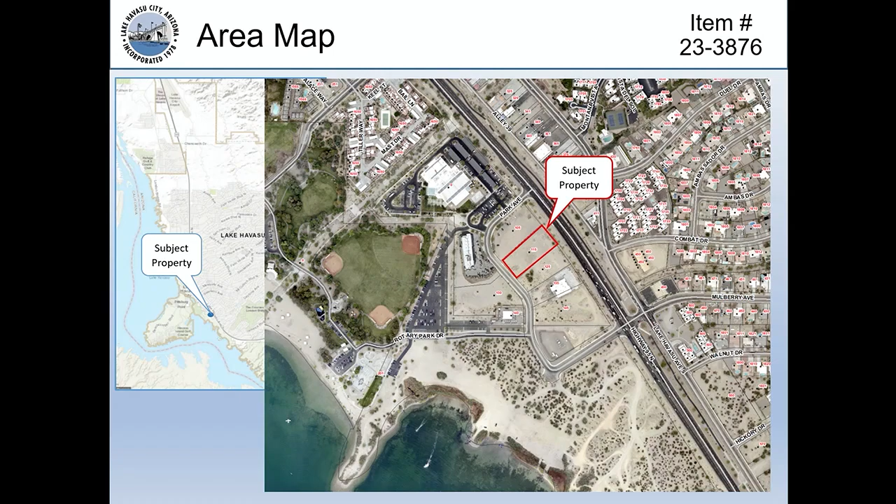Mr. Chairman, Commissioners, thank you very much. The subject property is located on the east side of Park Avenue, north of Mulberry Avenue, near the Aquatic Center. It's currently vacant and undeveloped. It measures about 1.25 acres, and there's a 50-foot utility easement at the rear.

The property and the properties to the east across the highway, and to the north and south, are zoned C1 limited commercial and are a mix of vacant land and developed commercial uses. The properties to the west across Park Avenue are zoned Island Body Beach, with a condominium and apartment complex in the permitting process and a hotel that's been constructed.

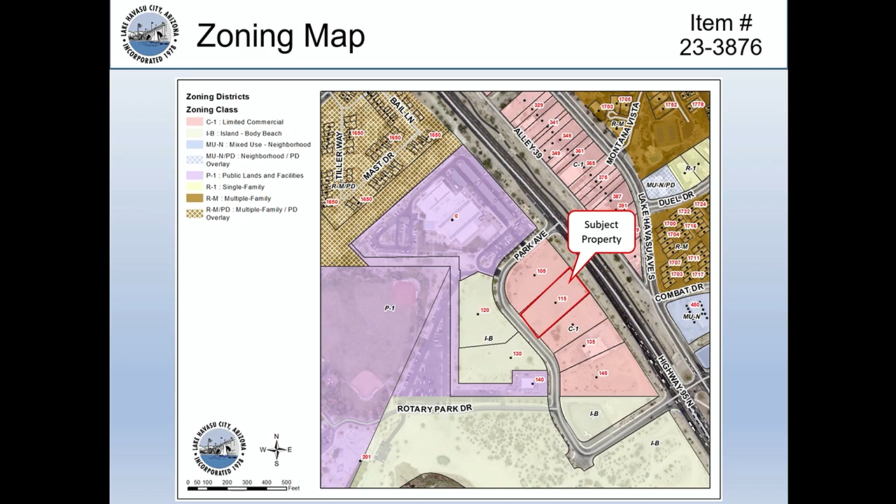The applicant's letter of intent and general development plan again show the two buildings as before. One is a 2,600 square foot restaurant drive-through. The other building is a mixed-use building with about 6,300 square feet of commercial uses on the ground floor, and the upper two stories are 24 apartment units, with 12 apartments on each of the second and third floors.

There will be reserved parking for the apartments, with the remaining lot used for the commercial and drive-through uses. The lot will be landscaped and designed to meet all the city standards.

The building elevations are shown here. The C1 zoning district allows building height up to 25 feet. The drive-through building will be well under that limit. However, the mixed-use building is proposed at 30 feet in height when measured from the zero point of the lot, which is 5 feet higher than the 25 feet allowed in the C1 district. Therefore, the applicant is asking for an exception to allow a 30-foot building height.

The mixed-use building will also include 24 multiple-family two-bedroom apartments, 12 units on each of the second and third stories. Multiple-family residential is not allowed in the C1 zoning district, so the applicant is asking for an exception to allow the use through this PD planned development process.

The building elevations indicate a 3-story building with varied parapet roof heights. Multiple commercial uses and covered parking are on the ground floor, with residential units on the second and third floors. Some residential units have balconies, and the building exterior is a mix of white, gray, and tan, with a number of alcoves and recesses to break up any long expanses.

The multiple-family use will be similar in appearance to a hotel, which is allowed in the C1 zoning district. Staff does not anticipate the multiple-family use having any major impacts on the neighborhood.

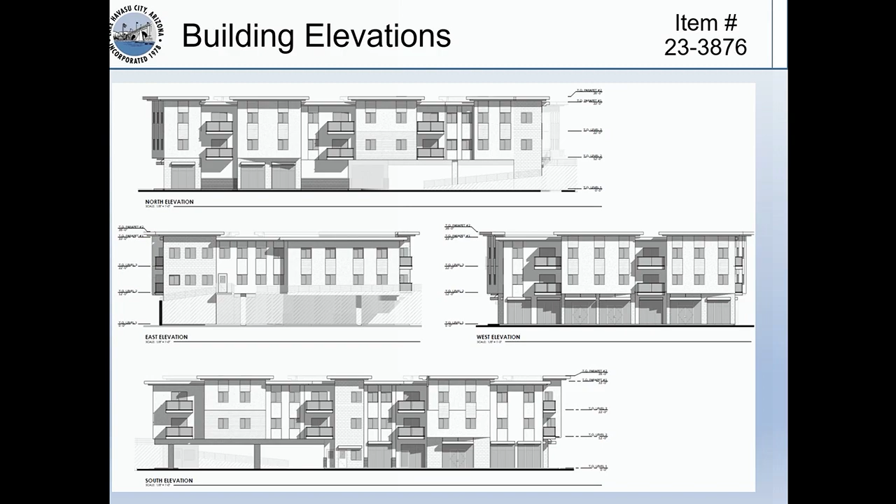The bicycle facility reduction allows 12 bicycle spaces in lieu of 12 vehicle parking spaces, resulting in a reduction of 12 parking spaces. So a total of 18 spaces are removed through the parking allowances, resulting in 70 spaces required. The plan shows 71 spaces, so the proposed number and type of parking spaces does meet the development standards, and no parking exceptions are requested as part of this request.

Unisource is asking that this portion of the easement be left completely open, allowing only landscaping or gravel at most. However, per our development code, vehicle travel aisles are to be improved with asphalt or concrete surfaces, or an alternative paving material as approved by the zoning administrator. The developer is proposing compacted decomposed granite as a paving material, which is not among the options approvable by the planning division manager. Therefore, a condition to allow compacted decomposed granite paving in this area is included for consideration.

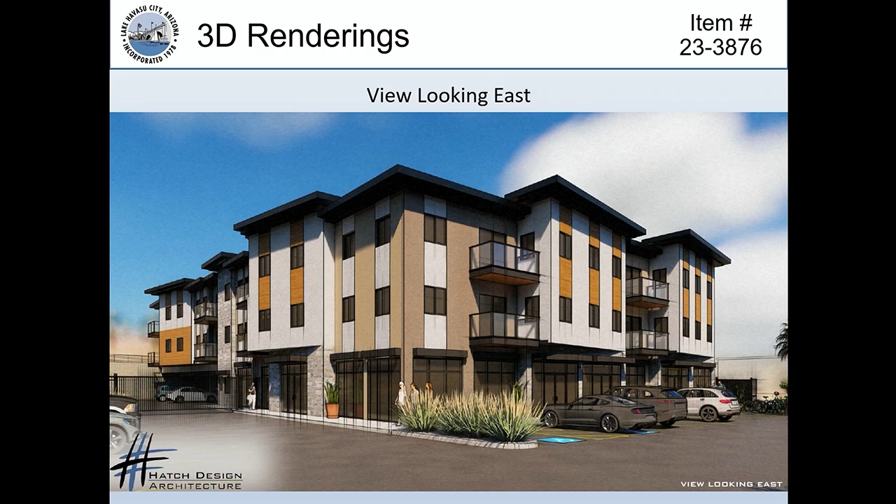The applicant has provided some renderings. I'll scroll through those as I read.

Staff supports this request with the following conditions. The development shall substantially match the general development plan submitted with the request. The developer shall coordinate with the Public Works Department and Unisource Electric concerning development within the rear 50-foot utility easement. Upon acceptance by the Public Works Department and Unisource Electric, compacted decomposed granite paving is allowed as an alternative vehicle travel aisle material within the easternmost 25 feet of the 50-foot utility easement. And finally, the developer shall coordinate with ADOT and the City Public Works Department during the development permitting process to address drainage and traffic impacts on the Highway 95 corridor.

As a reminder, building permits and design review and compliance with all the development codes and building codes will be required, including any off-site improvements such as street paving, curb, gutter, sidewalks, and traffic improvements that will be required prior to development of the property. That concludes staff's presentation.

Open any questions you may have. And the applicant is also here.

Thank you. Mr. Morris, I would like you to briefly recap the differences between this submittal and the previous submittal. Just highlight the major issues.

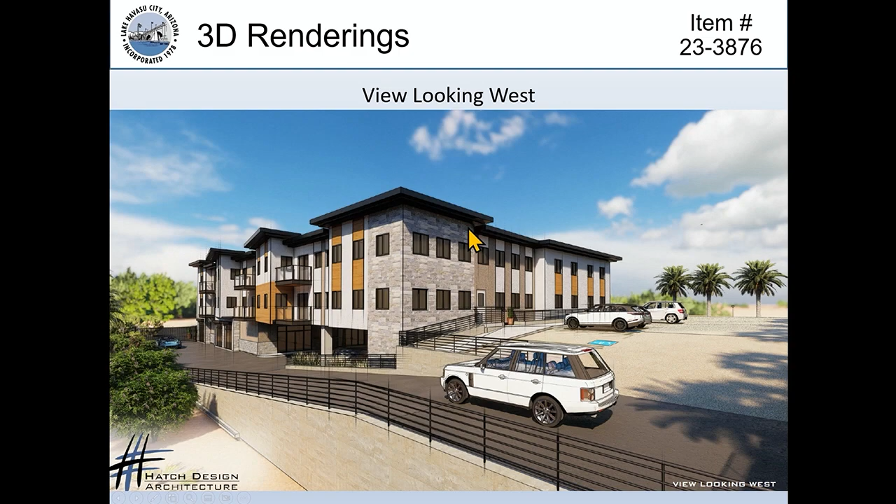All right. Thank you. One of the changes is the building itself, the multiple mixed-use building, has been shifted to the south, and the parking in the rear is now at a higher elevation, so as not to disturb that rear 50-foot easement. So the rear parking at this point is up almost level with the second floor of the building. So from the Highway 95 area looking toward it, it'll look like a two-story building. There'll be the potential here for a walkover from that rear parking for the apartment parking. This is all reserved for the apartments in the back, walking over to the second floor of the apartments, or the first floor of the two stories of apartments. That's really the major change.

Also changing the location of the proposed drive-through. Before it was down here to the south. They've moved it to the north side and provided almost, I think, 17 or 18 queuing spaces for vehicles. So moving the restaurant drive-through building north and moving the other building, the mixed-use building, toward the south a little bit are the major changes. All right, thank you.

So just want to clarify, the drive-through now, is that Park Avenue where it's going to be coming off of? The drive-through will be entered on Park Avenue? Correct. The entrance and the exit will be off Park Avenue. Okay, so Park Avenue is on this side, the left side of this slide, and then Highway 95 is to the right quite a little ways. There's 200 feet of right-of-way for Highway 95. Yeah, it makes much more sense. Before you would have had to pay at the cash or passenger window, so that works.

The Keller Williams building that is right there, do you know what the height of that building is? That new Keller Williams Realtor building? I'm not sure what that is. I think it's in the 30, or it must be 25 feet, because that's what the maximum height is for C1. Could they have dug down? It could be to go taller, though, right? So they're doing something similar to this project, because on Park Avenue, the lot slopes up from Park Avenue. So that zero point for measuring the height is up that slope a little ways. So that 25 feet could be measured from 5 or 10 feet above the street, depending upon where the zero is established for that lot.

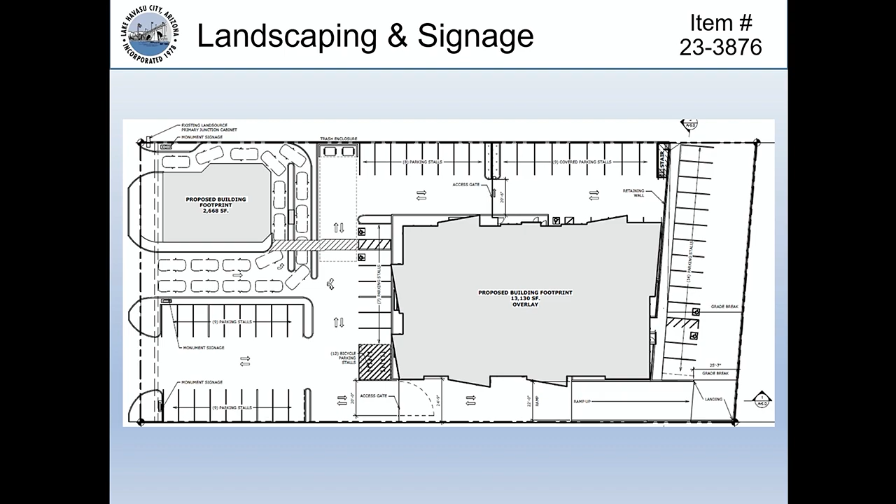I see the reasoning for the DG because they need to get to that utility if something happens, but I think it's going to get torn up with traffic and if it rains. I hope they're going to maintain that on a normal basis, and continue working with Unisource on that, because that's going to get a mess with cars driving in and out of there. I've used that stuff before, that's just a fact. The parking for the residences, is it only dedicated? Like, are they going to have assigned spots? The resident has to park there, no one else can park in a residential spot.

I'll have to let the applicant address that, but there is, the rear area is gated off. So where the access is to the multiple family, there's an access gate on the south side of the building and an access gate on the north. Everything behind those access gates satisfies all the parking requirements for the multiple family.

Luke, revisit the parking for me. When we go back to the parking chart, we had made adjustments on the required parking for the restaurant from 26.7 required down to 18, and on the retail, 21 required spots down to 13. How are we substantiating those reductions? Because it just seems like we're cramming a bunch into this spot.

Thank you for the question. The development code does allow in certain situations reductions to parking requirements for multiple family, mixed use, and commercial type development. One mechanism is shared parking. You have two different uses, combine the total required parking for those uses, and divide it by a factor. In this case it's 1.1, so it's basically about a 10% reduction for those two uses combined, using the highest two uses.

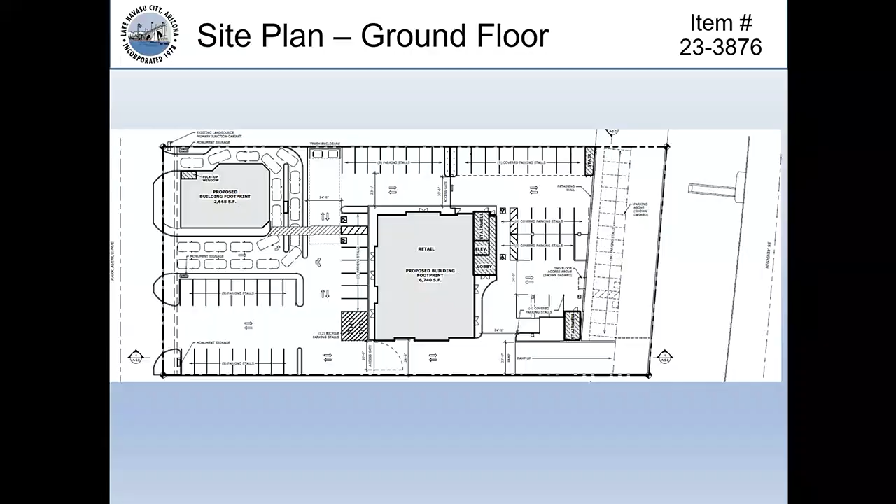I guess I'm concerned. The parking for the residents is gated off, so we've got that covered. But when you go back to the retail, 13 spots, and it's really in front of the retail building where you have those designated. If you've got 3 retail locations with an employee or 2 there working, that's going to be 6 parking places, leaving only 7 for customers unless they overflow into the restaurant.

And the second part of that is on the restaurant and the drive-through. We're not even thinking, we're using little cars for our template, but what about any oversized vehicles? Because this is going to be in an area where people are probably going to be pulling trailers and other items, and it just seems like it's not going to fit.

So this doesn't necessarily say there will be 18 spaces reserved for a restaurant and 13 for retail. There'll be 31 spaces for however the developer or the tenants figure they'll be shared parking or not shared or reserved.